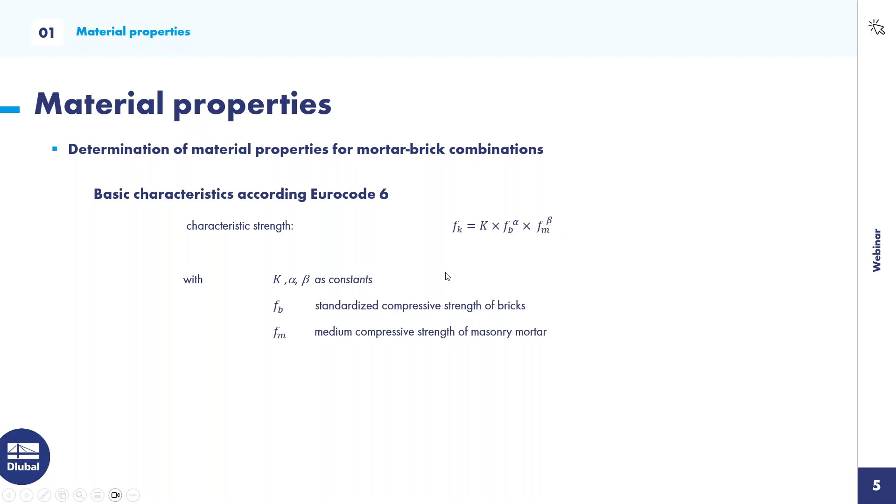When we now choose any product, we can go to the website of a producer, and here you can find some data sheets where the producer gives information about his products. If you choose Porotherm 38, for example, you can find an Fb of 11.5 and a stone group of 2.

With this information, we can go back to the standard and find that the constant K is 0.7 and the constant alpha is 0.7. We had the Fb, and with this information we can compute our characteristic strength. In case of using a thin layered mortar, the part of the mortar has no influence on the characteristic strength, so we only have the part K multiplied with Fb.

If we compute this, we get an Fk of 3.87. When we go back to the data sheet, sometimes the value Fk is also given, and here you can see in the case of thin layered mortar, we have an Fk of 3.8. If we have another mortar, here called dry fix, you have another Fk.

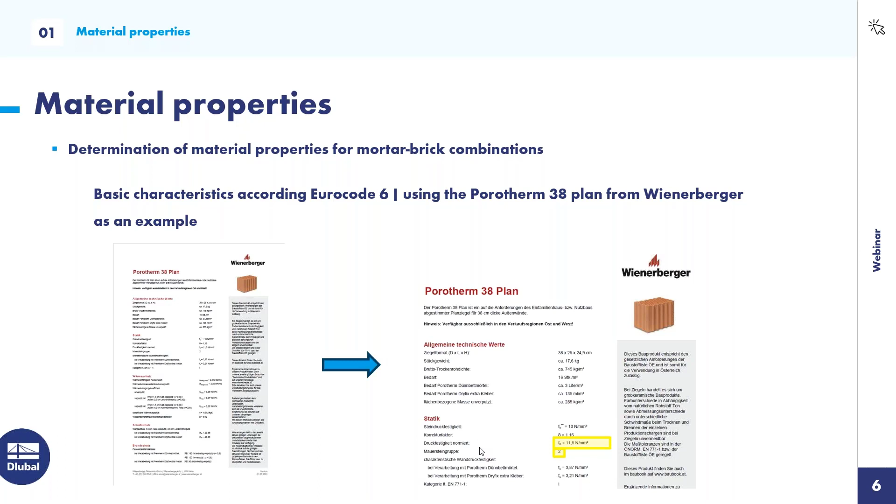So the next step we need is the design value. The design value depends only on the characteristic strength and the safety factor. When you take a look at the standard, in our case we have a safety factor of 2, and then you get the design value.

So two more values we need: one is the Young's modulus. The Young's modulus of the masonry wall depends only on Fk, and you find the formula Fk multiplied with 1000. Here the left part is some reduction for the case of very small stones.

If you have more very small stones, you have more mortar in the height of a wall, and this has an effect that the Young's modulus is lower. That's why we have a reference height and a needed stone height. If you have the reference height, or a stone height of about 250 millimeters, this factor is nearly 1. It only has an effect when you have small stones.

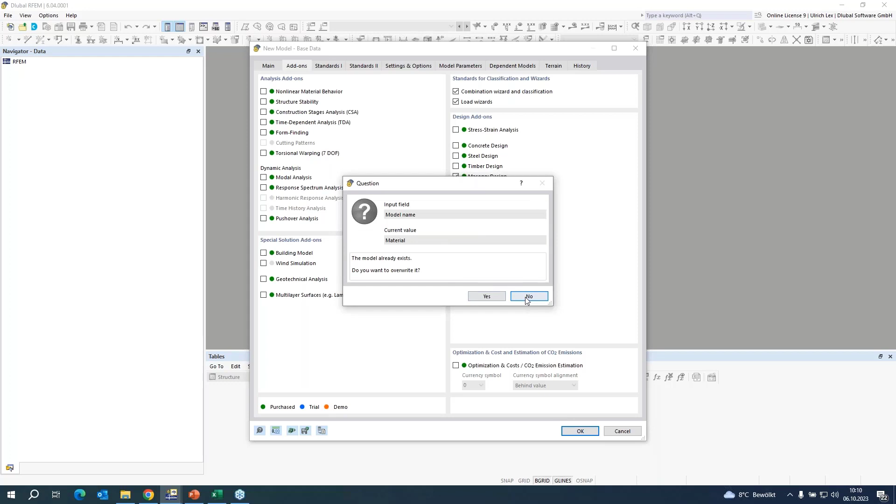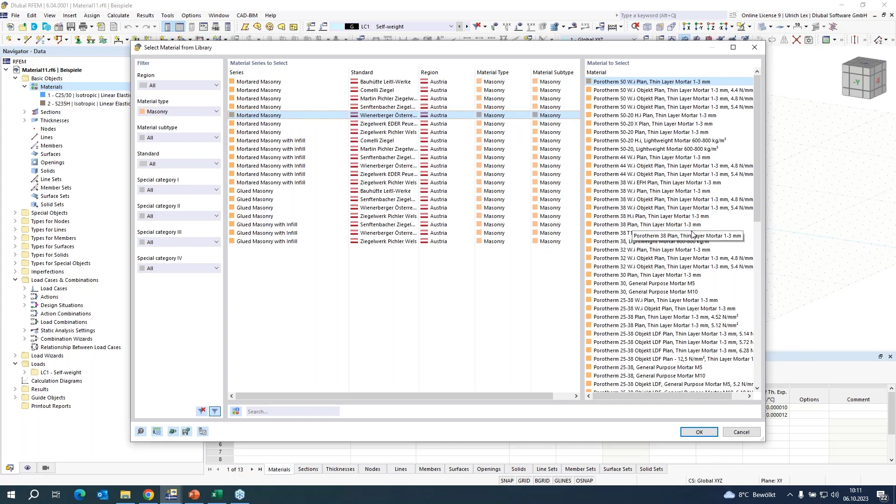And can create the new material. So I have to choose the material type masonry, use our orthotropic material model, and can search in the database for our product. It was the Porotherm 38, thin layered mortar, and choose this product.

So you have here the different cases, and you can see here automatically filled out the tables. You can find the group 2, the mortar, thin layered mortar. You have the dimensions of the stone, and you can find this normalized compressive strength.

If you go to the used parameters in the material model, we can see that we have the ultimate compressive strength now in the loaded direction, 1.93. When I go back to our presentation, we have a design value of 1.93 computed. So it's exactly the same what we use in our program, what we now computed.

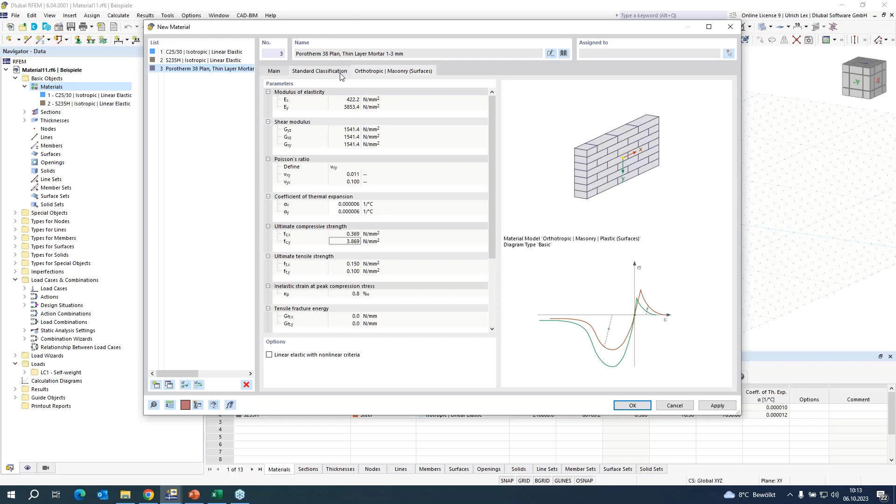So if I change now our safety factor to 1, then you can see that it does not have an influence to the Young's module, but our compressive strength is according to the safety factor 1. And that's all what we do. We use only the parameters from the standard for the calculation.

So I want to continue in the presentation. This computation, what we did, is according to Eurocode 6. If we take a look on the national annex of Germany, then these formulas are a little bit different. In the national annex of Germany, there is used not an FB. For the stone parameters, it is used the FST instead. The FST is the medium stone pressure resistance.

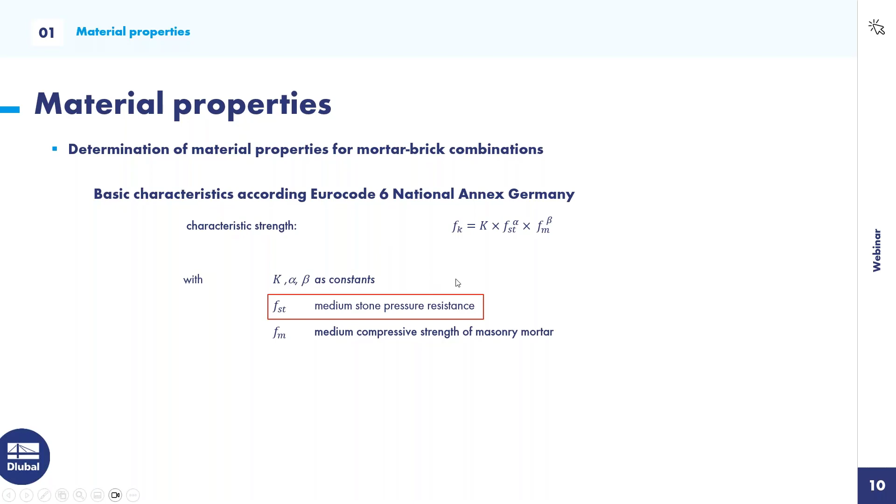So you have to be a little bit careful because there are the same constants called, but they are a little bit different to the main document of Eurocode. But it is the same.

You can choose any product from a manufacturer. You will find here a compressive strength class, maybe of 6, for the product of Porotherm T8. And when we take a look on the standard, you will find that for the compressive strength class of 6, you have an FST of 7.5. The constants K and alpha are 0.7 and 0.605, and you get the FK of 2.37.

We can switch back to the data sheet, and here you can find also the characteristic fk of 2.3. So mostly you find this fk in the data sheet, but sometimes not. Then you can compute it with these formulas.

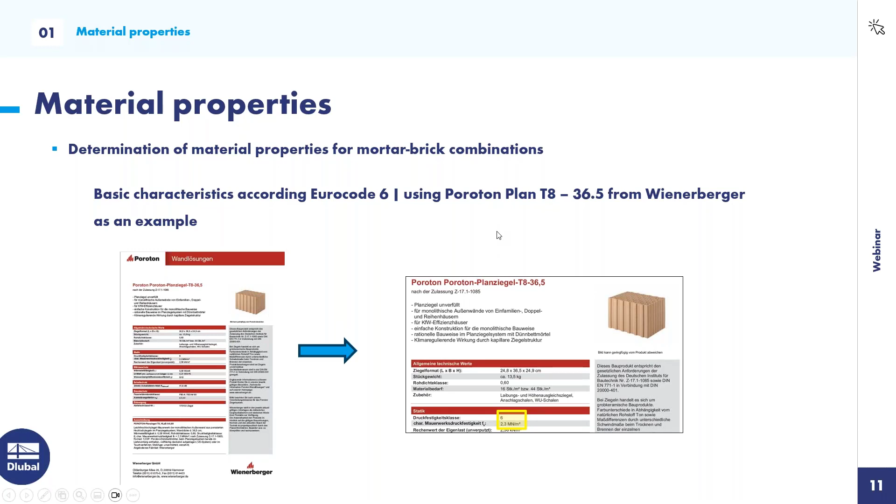The same is here for the design value. You have fk divided by the safety factor. In the case of DIN, you have 1.5 and get an FD of 1.58.

The same is it for the Young's module. We have also again the formula fk with a constant. The constant is in this case 1100, and the shear module is the same like before.

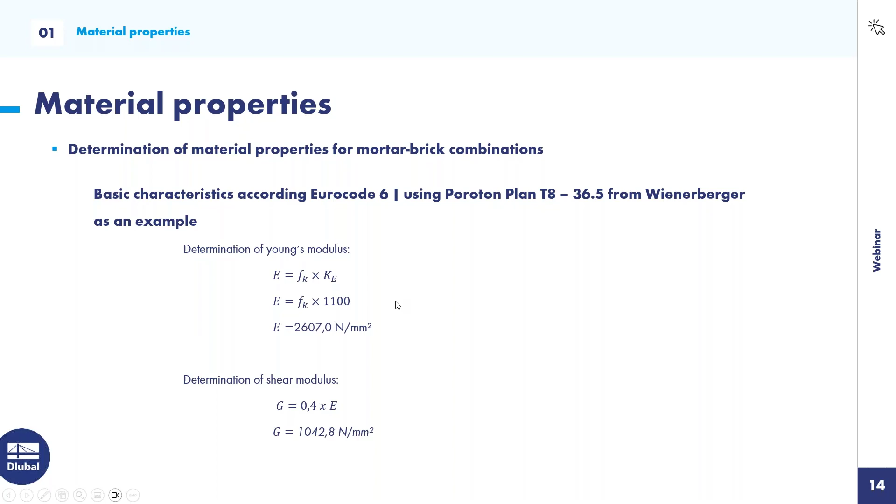Okay, this is all for the theory, and with these computed values we can continue with the second example. In the second example, I want to show you our isotropic plastic material model, where you can determine internal forces of a masonry wall. There is no design check done. It's only to determine internal forces.

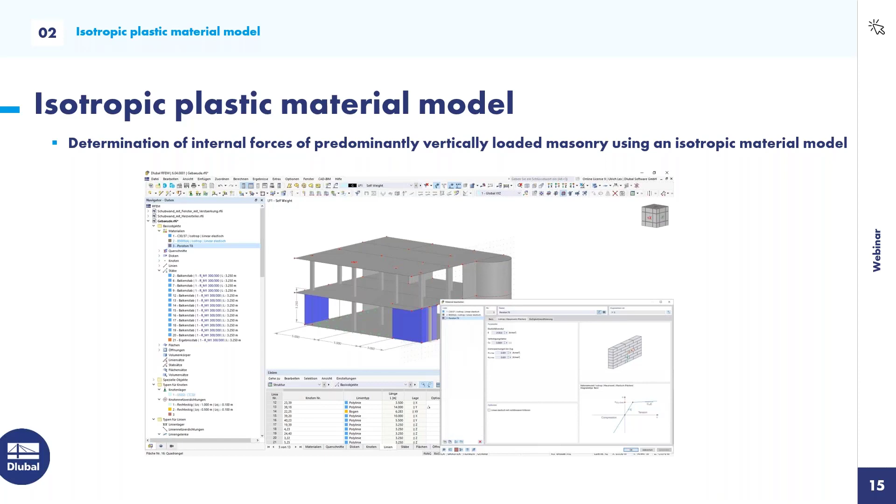So for this, I prepared already an example where I have some concrete walls and concrete slabs, and here I want to add our masonry parts. Firstly, I will show if my masonry add-on is checked on. It's checked on, okay. So I can create a new material with our masonry. Now I want to use the isotropic material model.

And I want to use our computed values before. Maybe we have the E module of 2600. I had to insert it here, 2600. And I had to add the shear module, 1040.

Here I can add the specific weight. You can find it also on the data sheet. And that's all we need for this material model.

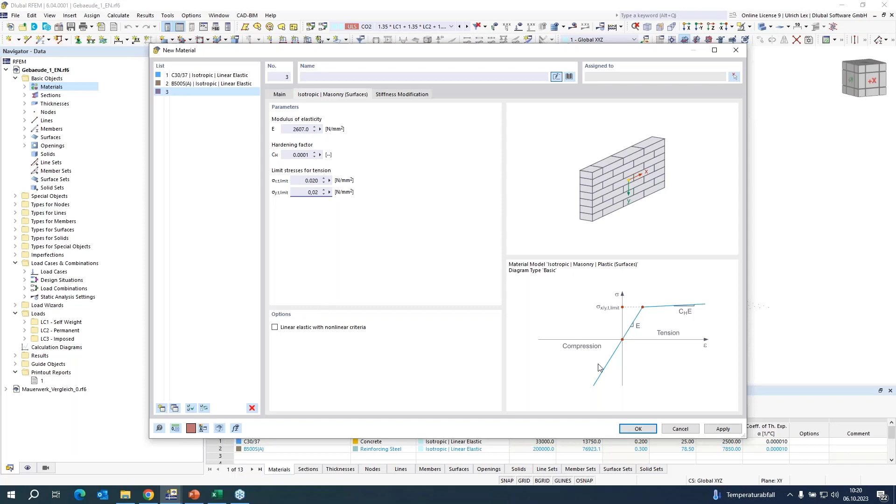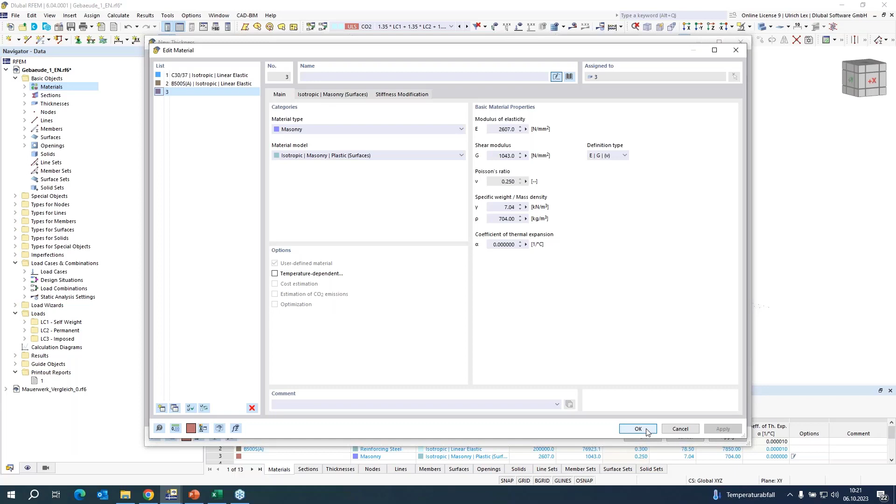If we have done all these inputs, we can continue with OK, and we can create our masonry walls. Oh, firstly, I have to create a new thickness where I use our masonry material type. This stone has a dimension of 365. Okay.

And then I can create my surface.

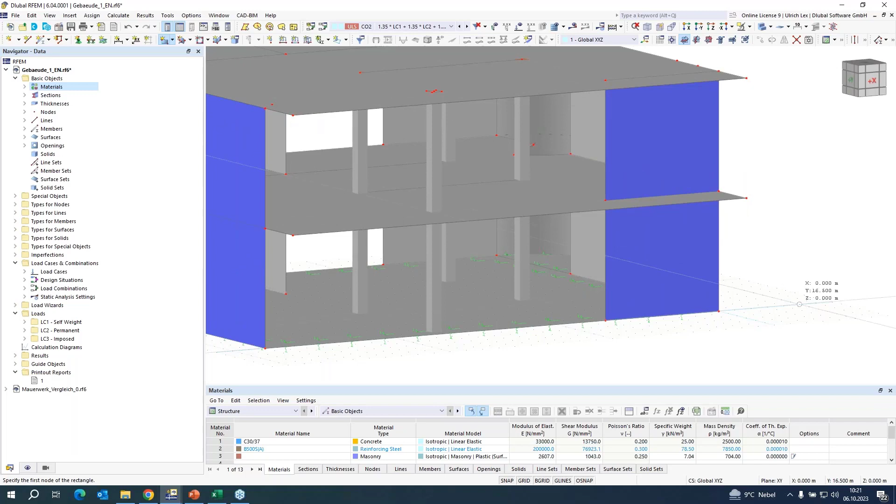In this example, I only want to use these 6 surfaces of masonry.

Okay, the loading I have already created. There is 1 times the self weight, the permanent weight, and the imposed load.

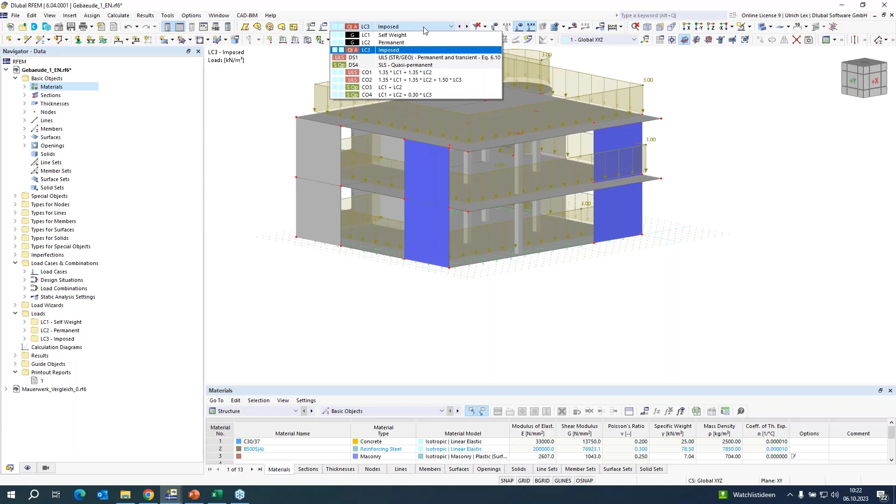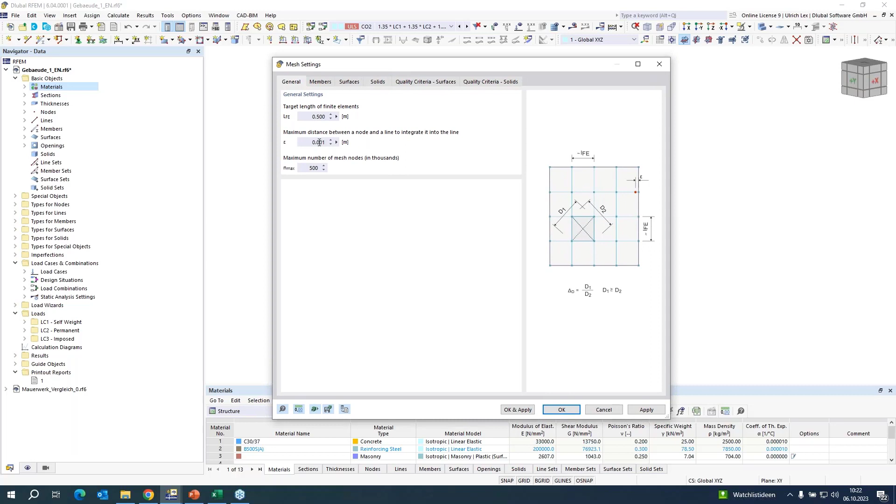And now we can check the FE mesh before the calculation. The FE mesh in general is 0.5. For masonry, it's better to use 0.2 or 0.25.

So I will create a mesh refinement and assign it to my masonry walls. Okay, so far so good. That's all. And now we can compute the building.

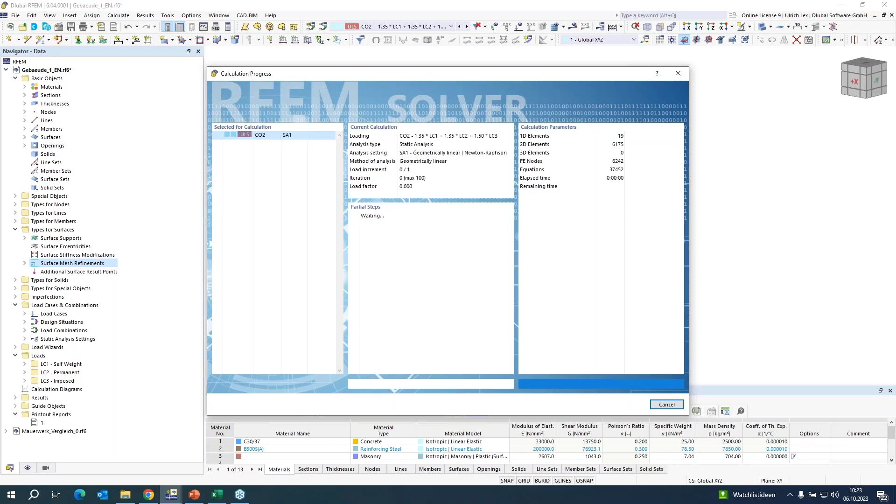So, for the documentation of the results, I have already created one printout report, but here are only tables. And now I want to show you how you can document, especially the results for the masonry, to do any design checks with maybe an Excel file or something else.

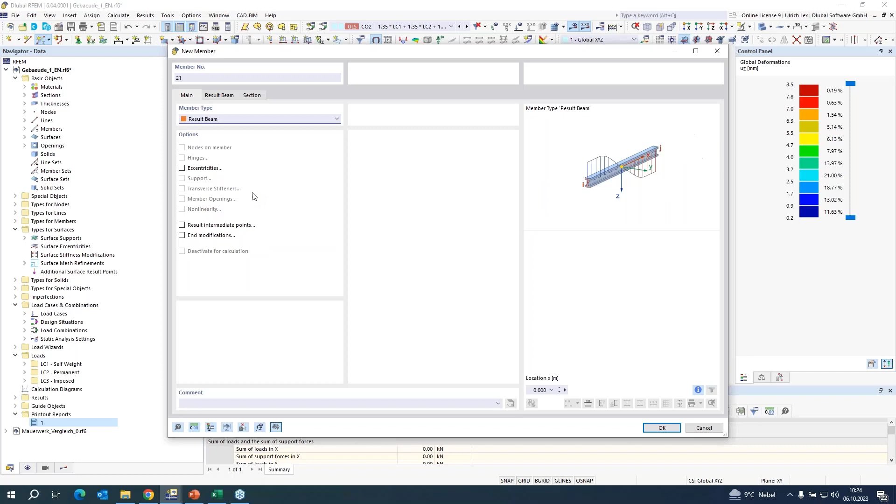One good tool we can use is the result beam. When we create a new result beam, you have the possibility to integrate stresses and forces from a surface and show these results as beam results.

I use now the type to integrate with a block, maybe from 1 meter. Then I get the results per meter.

I want to integrate the results of this surface. Okay. And create here a new result beam.

The result beam itself also has a section, but it does not have an influence for us now. The only thing is the dimension of the integration, and this is 1 meter.

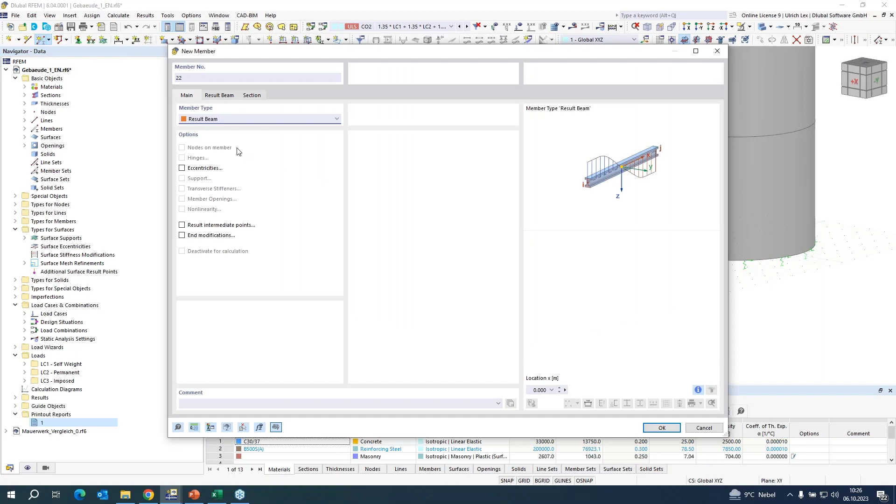We can here create a second beam. Okay. And here we have to integrate the results of this surface.

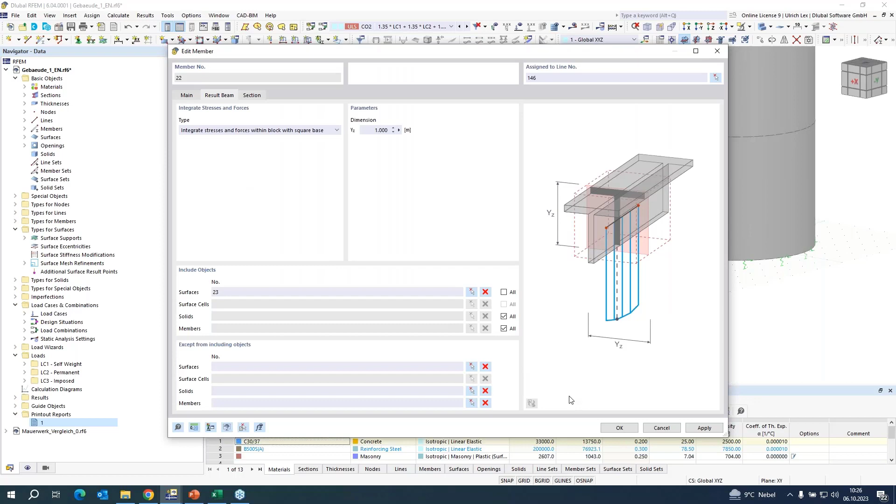Now we have to compute again. If you know that you want to create a result beam, then you can do it before the first calculation. And now you can see that we do not have only the surface results. We have the results of a beam to show to you.

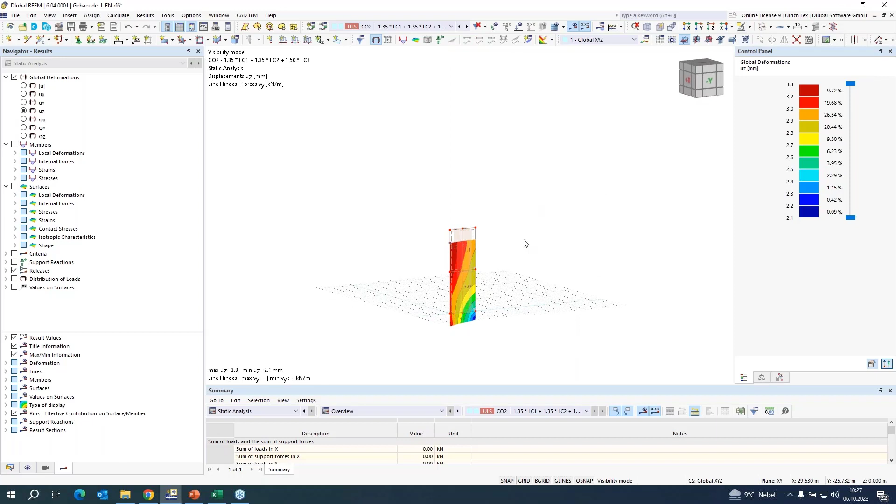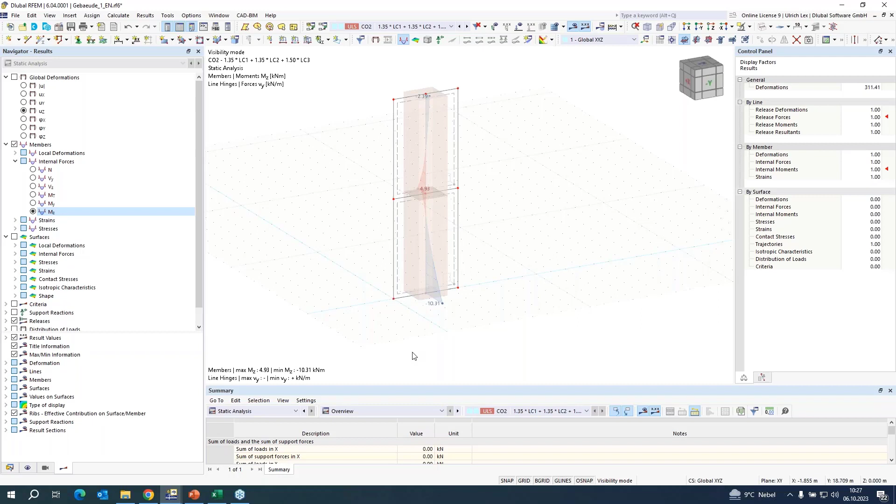And here you have also member results, the internal forces, the normal force, or also the moment. And with these results, you can do further checks. These results you can also document to the printout report.

When you print it to the report, you can use the print graphic to the report. Here you have different settings, maybe as a screen, as window filling. You can define any scale or something else.

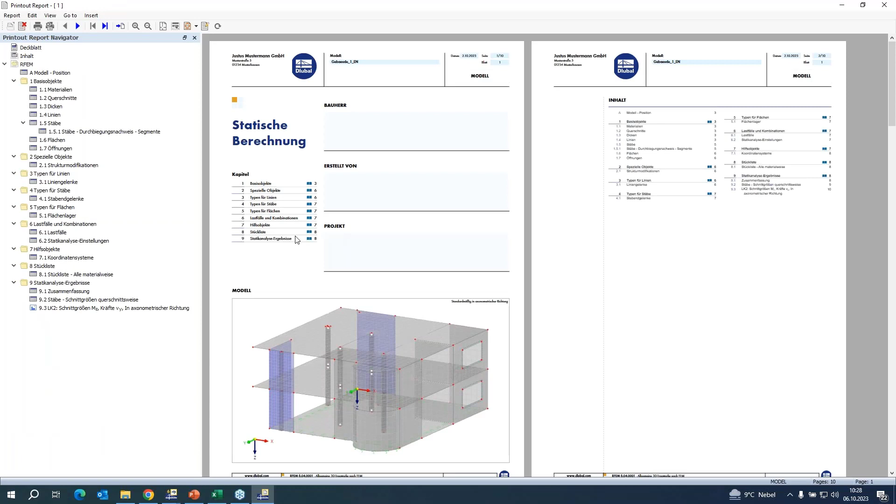If you say save and show, then the printout report is open and you can see where the picture is printed. You have at the end now the report, you get this picture of the results.

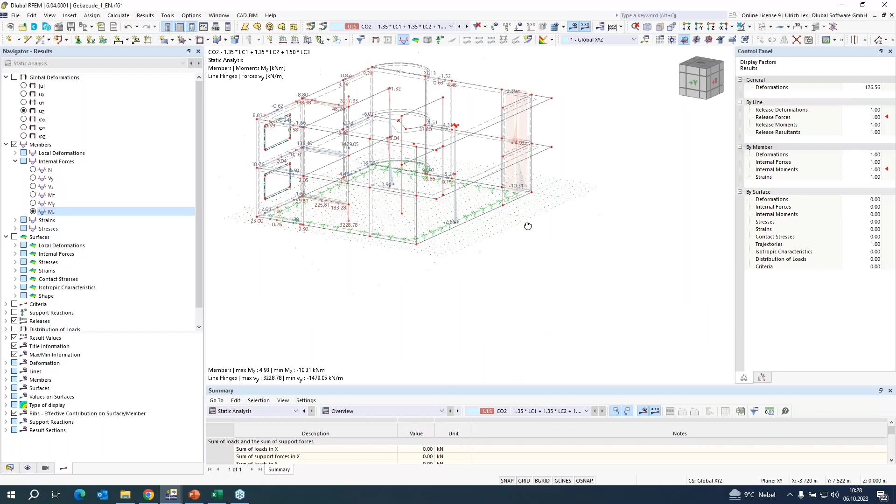A second possibility to document is to use the result diagrams. I want to show it on this wall. Here we can expect that the forces on the end or in the beginning are higher than in the middle of the wall. And this you can show very easily with the result diagrams.

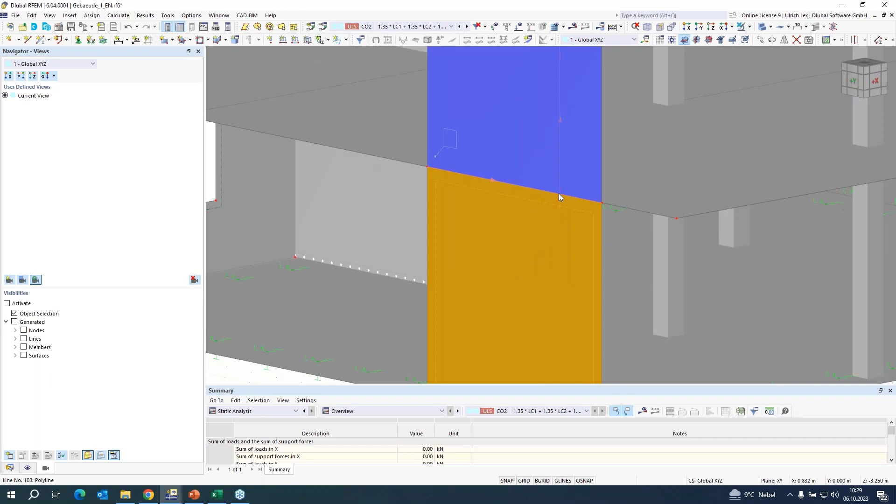I want to show it for the surface number 18 on line number 108. Right click on result diagrams. Can here choose the surface number 18 on line number 108.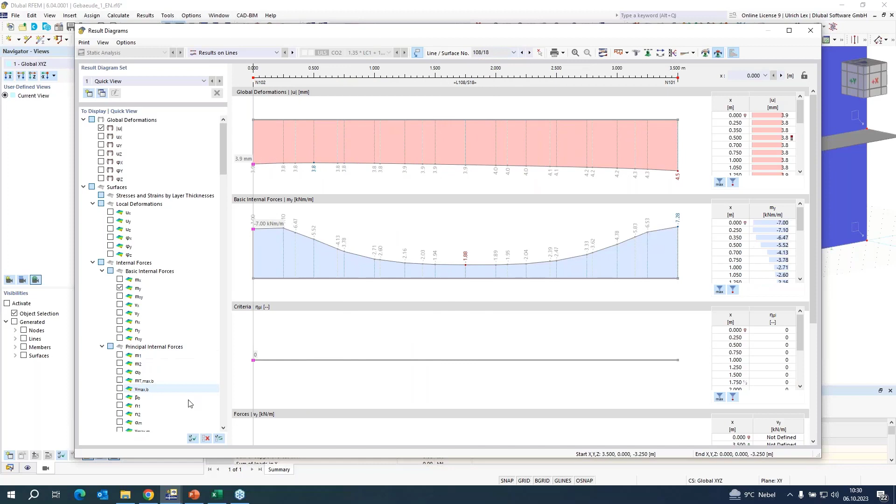And here maybe I can take a look on the basic internal forces, the Ny, it's our normal force. And we can see that the forces on the beginning and on the end are very high.

Here you have the possibility to smooth the results, maybe in a range of 25 centimeters. You can add a smooth area, and also for the end. On the end, it's maybe 3.25, to the end.

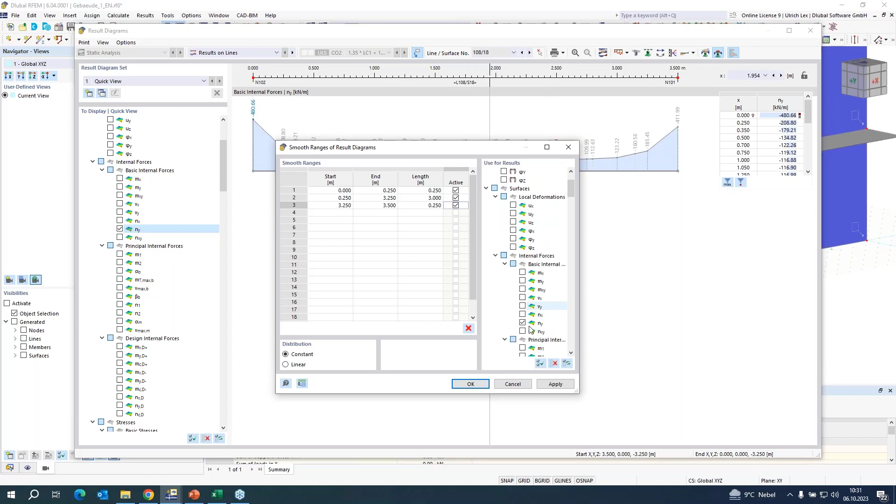You want to use it for the NY, and then you get real forces. You get maybe for the start, nearly 90 kilonewton. For the middle term, you get 124 kilonewton per meter, and on the end you have 75 kilonewton.

This picture can also be printed to the printout report. You have to use again the print icon, print to printout report. You have the possibility to rotate the results.

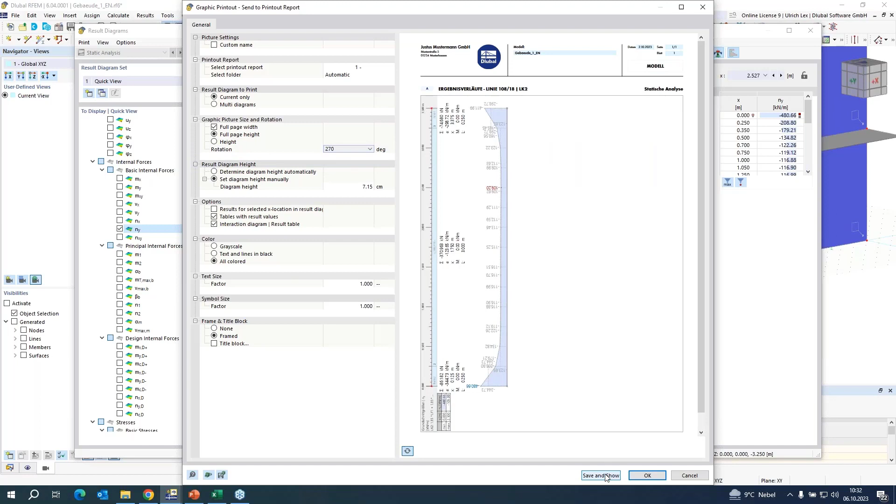And when we again save and show, the printout report is open and the results are documented. So, in this way you can take a look on each surface and print these pictures to the printout report to have all the results you need.

Okay, that's all for this example. One thing I want to show you is the effect of the tensile strength.

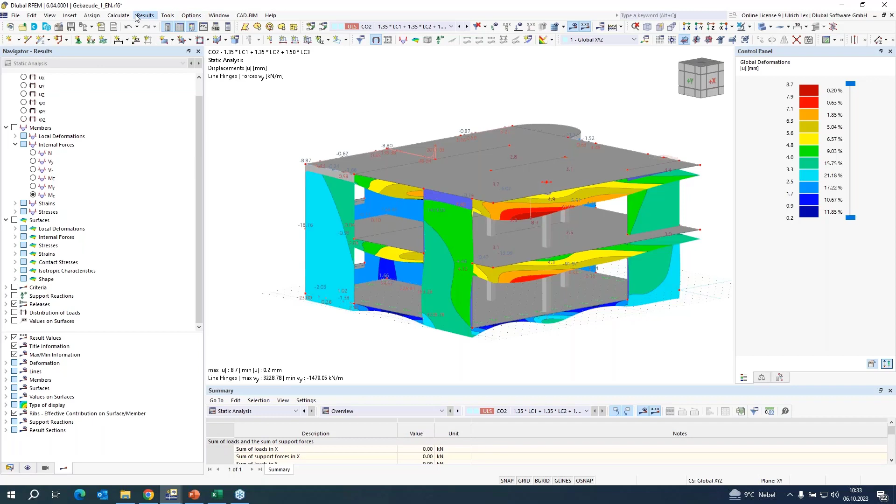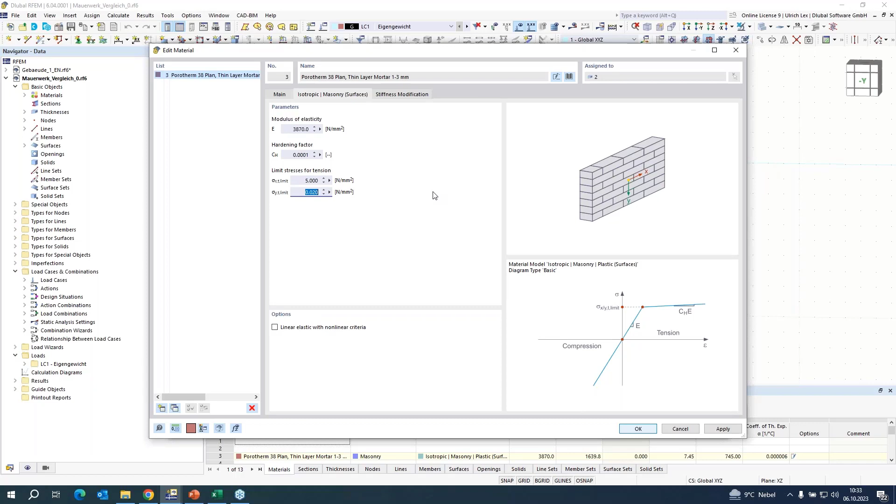I have created one example, one wall with the material model isotropic masonry plastic. And if you now allow a very high limit stress for tension, then you can create the effect that the nearly point load is smoothing to the complete wall.

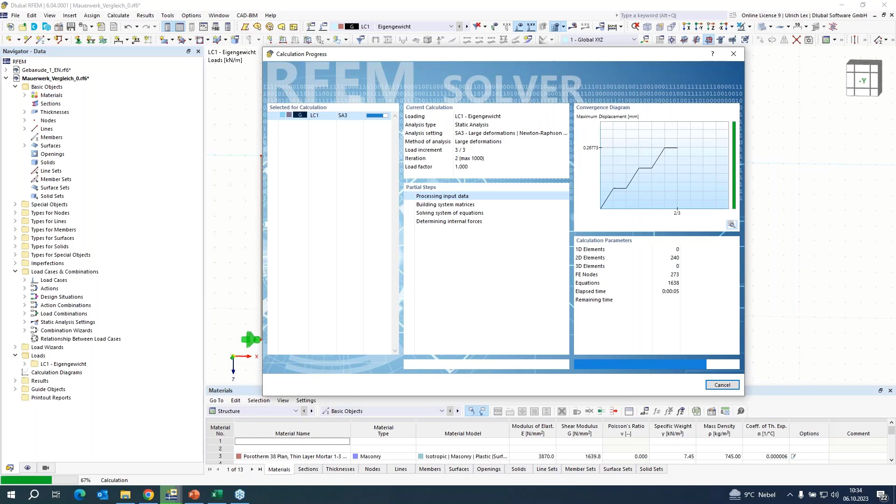So now you can see it on the angle. You can see that the small point load is spread above the whole masonry wall.

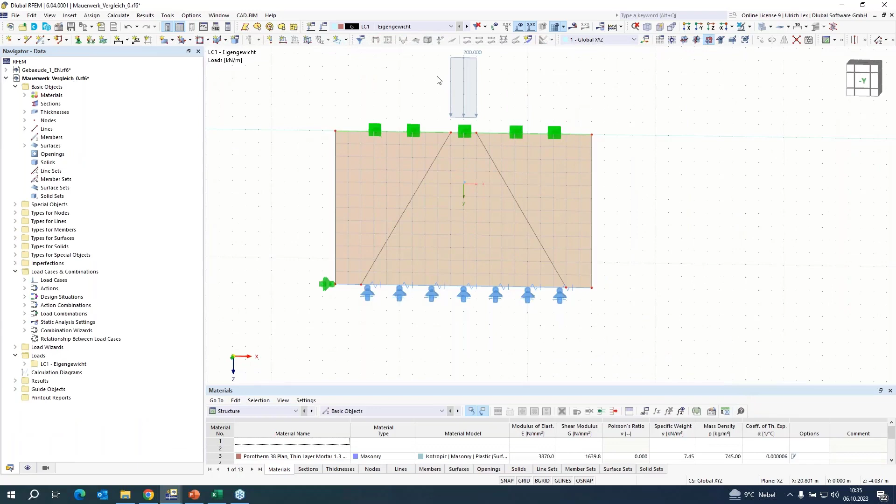If you now change the limit stress for the tensile to a very small value, then you can see that there is no smoothing of this load.

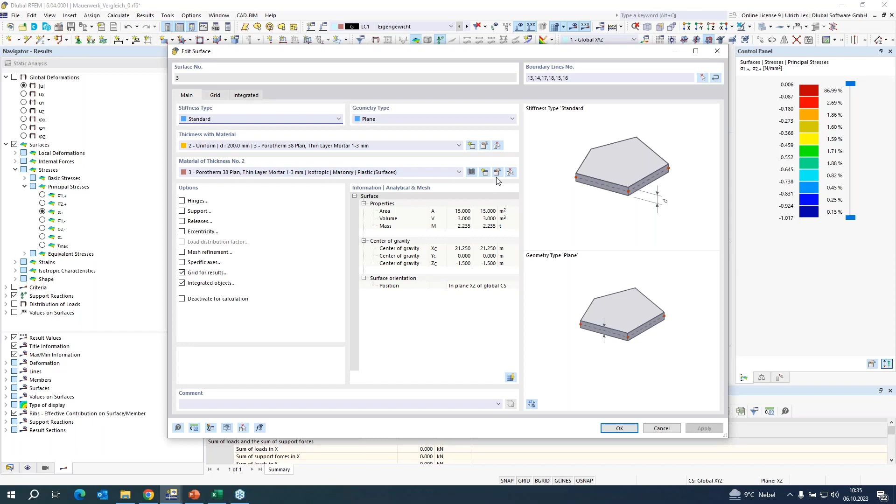You can see that the load nearly goes directly through the wall and has no or not much smoothing. I choose now a tensile strength of 0.02, because then I have a smoothing of about 60 degrees, which masonry normally has. So we can see that the smoothing is about 60 degrees, and there the load is smoothed.

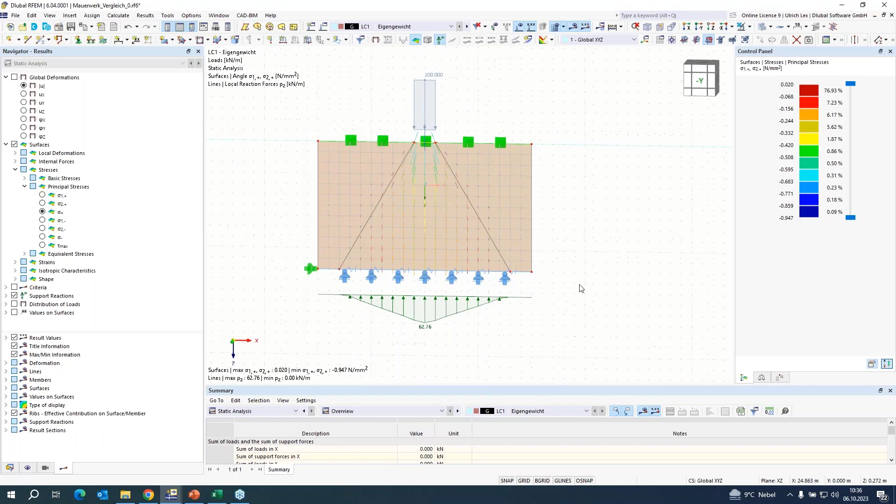Okay, that was all for the second example. I want to go back to the presentation, and I will start with the third example, the shear wall.

For the third example, we want to take a look on an existing wall, where I have an existing calculation: a wall with a vertical load of 390 kilonewton and a horizontal load of 100 kilonewton. The wall is 3 meters. The length of the wall is 3 meters. The height of the wall is 3.50 meters. Now I want to show if there can be created an intersection.

I want to take a look at two different cases. First, if we create the intersection in the lower part of the wall. Second, when we create the intersection like a window, and we want to show if it's possible to create it, if the wall is then overloaded or not.

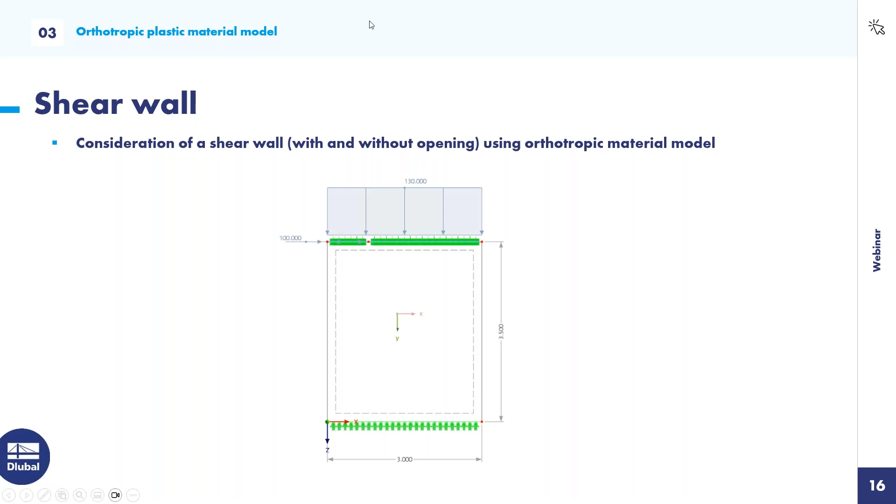So I switch back to the program. For this wall, the first time I want to create new material. With the orthotropic masonry material model, I want to choose one Porotherm 25.

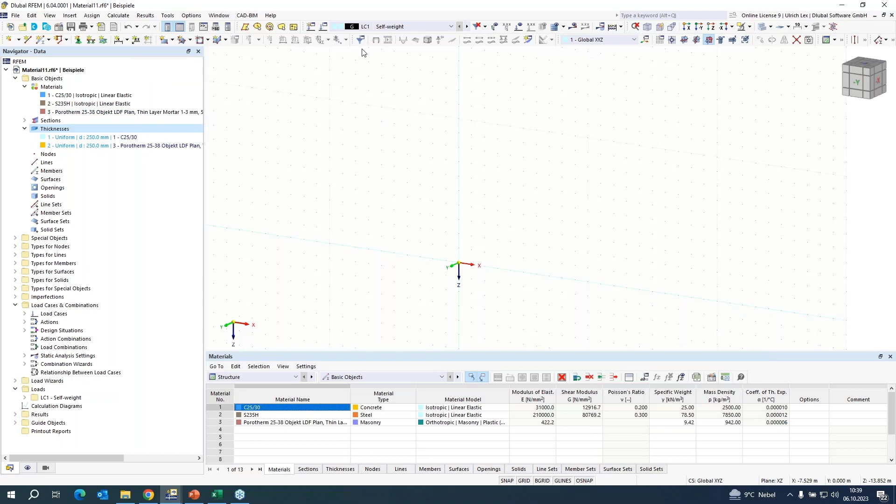So I have to create a thickness with the Porotherm, 250 millimeters. Okay, and now I can create my shear wall.

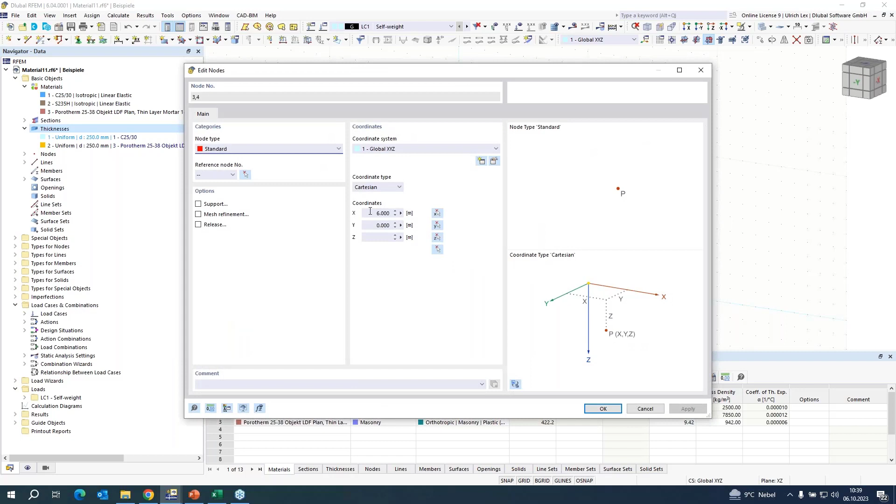With dimensions of 3 by 3.50 meters. The support downside is in Z, X, Y direction and around X. On the top of the wall, I only want to support it in the Y direction, and here a small spring constant.

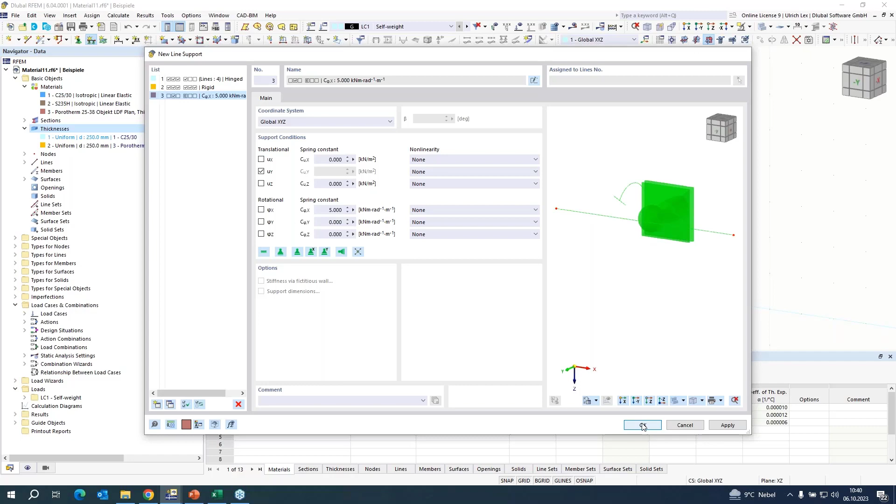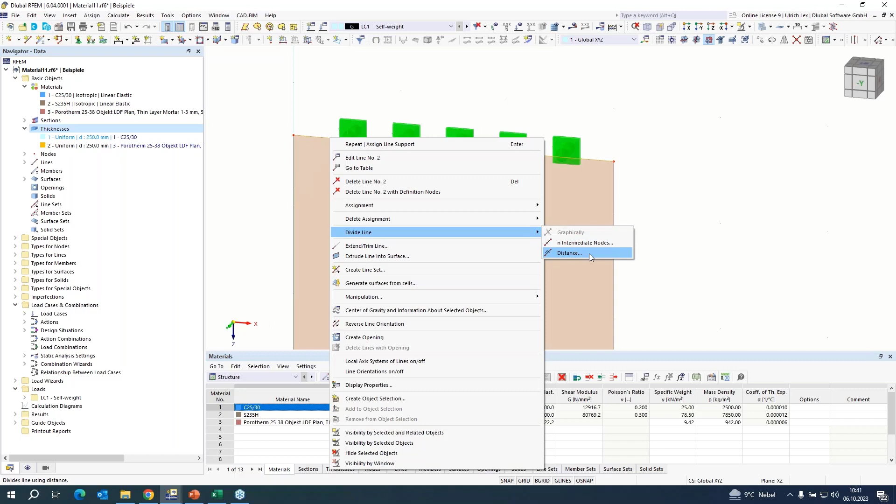So the horizontal load I will bring up, not only at one point. I want to divide the line. Here on the top of the wall, I want to add a small beam so that my horizontal load does not destroy my first FE elements.

So I want to add here a small beam, maybe still a small beam, 50 millimeters.

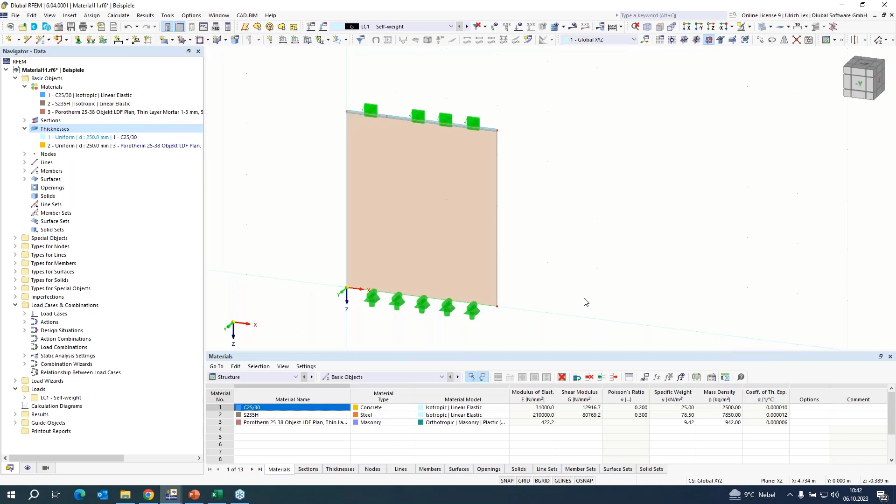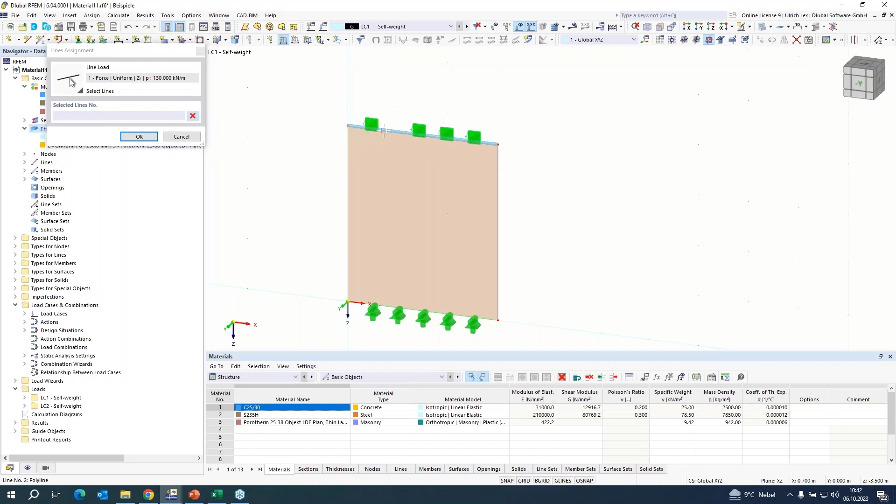So the last part, I had to create the load: one time the vertical load and the horizontal load. In vertical direction I have 130, and over 3 meters that's my 390 kilonewtons, and 100 in X direction.

So before the calculation, we have to take a look at the FE mesh. We want to use 0.25 meters. Okay, and apply.

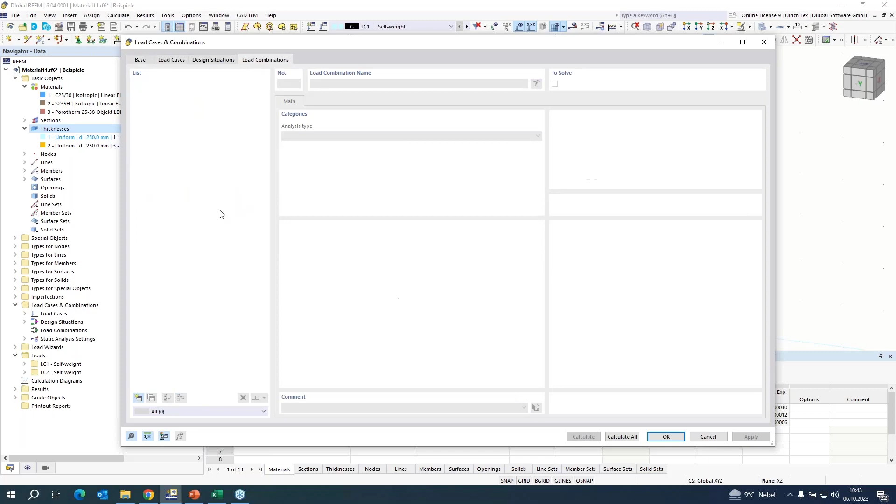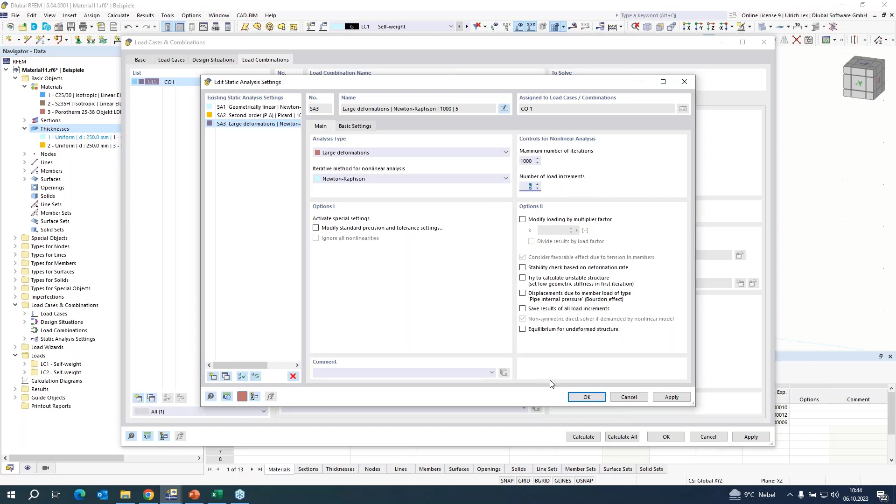And then we can compute; we can create one load combination. We want to use the large deformation analysis and set here some load increments, which is important for the plastic calculation. We can save the results if we want to take a look at it, and we have to assign both loads.

Okay, now we can start the calculation, and now we can see the calculation is possible. The load is not, or the wall is not overloaded. That's what we would expect, because we have an existing calculation, so everything is okay.

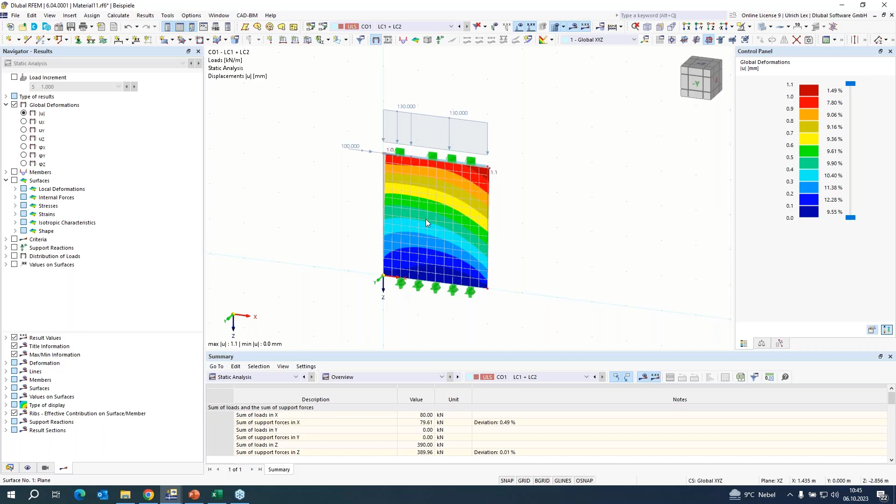So now, what can I do? I can take a look at how much horizontal load the wall can have before the damage, before it's overloaded. It's very easy to take a look at it, and I will do it now.

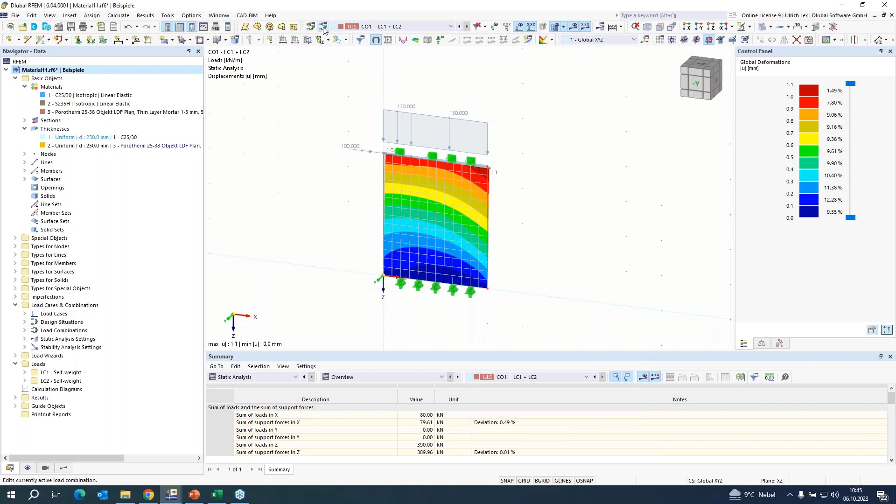So we have to activate our add-on stability analysis. With this stability analysis, I can first copy my horizontal load. Just again. Copy. Okay.

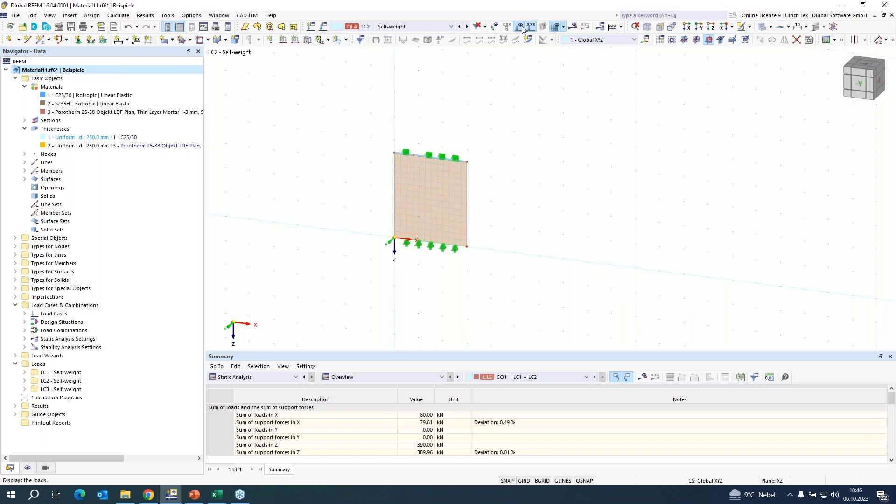Okay, this now it's correct. So I can delete it. I can copy my horizontal load and reduce it maybe to a value of 10.

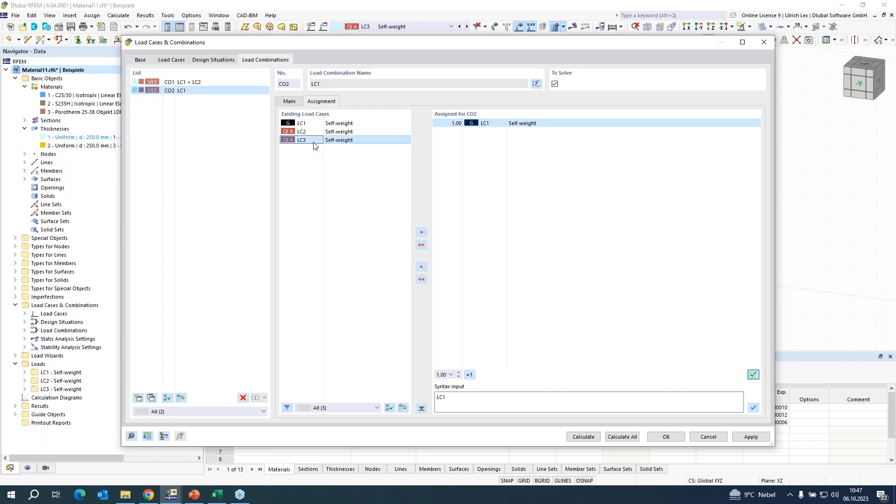I can create after this a new load combination. I have to use also for the load cases the large deformation analysis, and create now a combination of load case 1, my vertical load, case 3, my reduced horizontal load, and say okay, my initial state is the vertical load, and I want to increase my horizontal load until the wall is damaged.

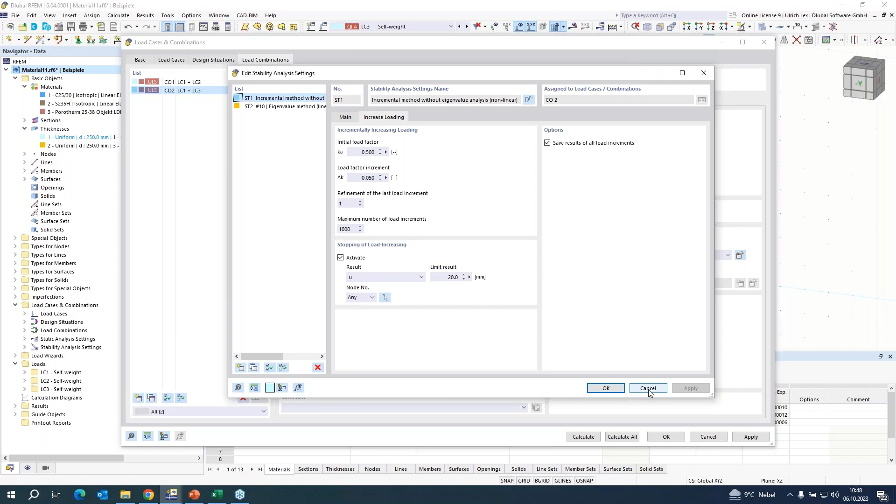Here I can also save the results to show the results at each load step, and I can activate some limit of deformation. Okay, with these settings, I can increase my load until the shear wall is overloaded. The calculation takes about 2 minutes.

That's why I have prepared it with results and want to switch to this file. So when I take a look at the results, here the stability analysis was running, and it shows me that I can increase my load about 8 times, and I get a maximal horizontal load of 110 kilonewtons.

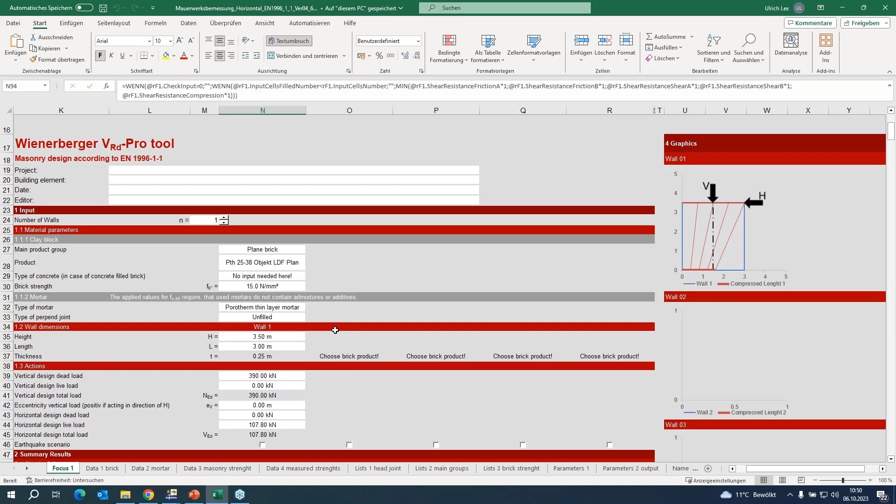If I want to take a look at the formulas according to the standard, we can check if it's the same. I have here a tool from Wienerberger where you can compute the maximal horizontal load. You can choose your stone-mortar combination, insert the wall dimensions, and insert the vertical load, and you get a maximal shear resistance.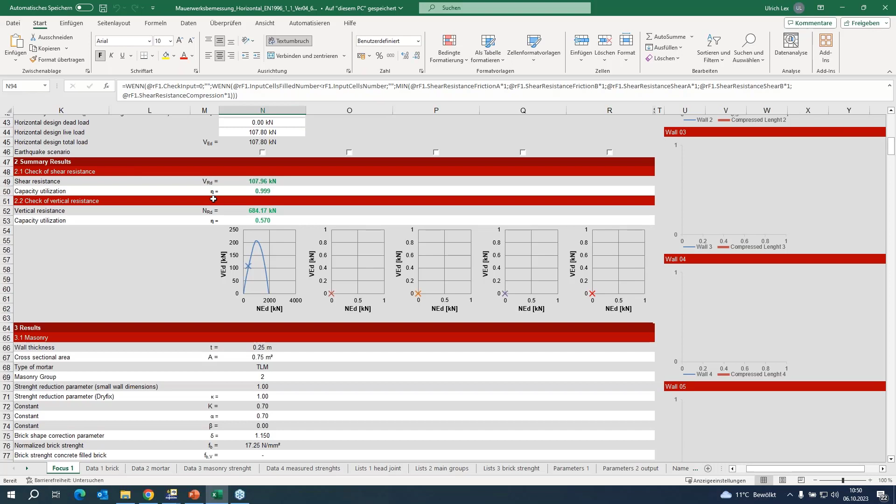The formula according to the standard leads to a value of 108 kilonewton, and we compute with our program a value of 110. So it's nearly the same—I would say it's exactly the same—and it's good, because that shows that our material model computes the same as the standard says.

So now we can continue with our initial problem. We want to create an opening here in the lower part of the wall and want to show or look if the wall is overloaded or not.

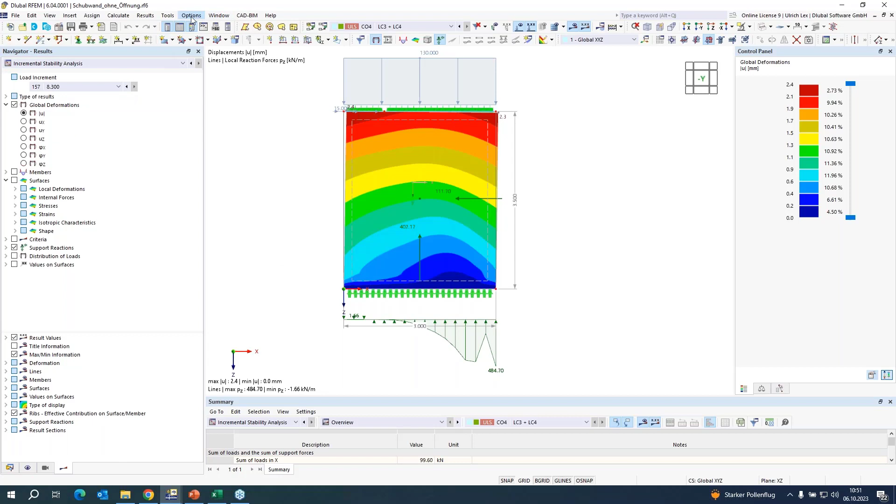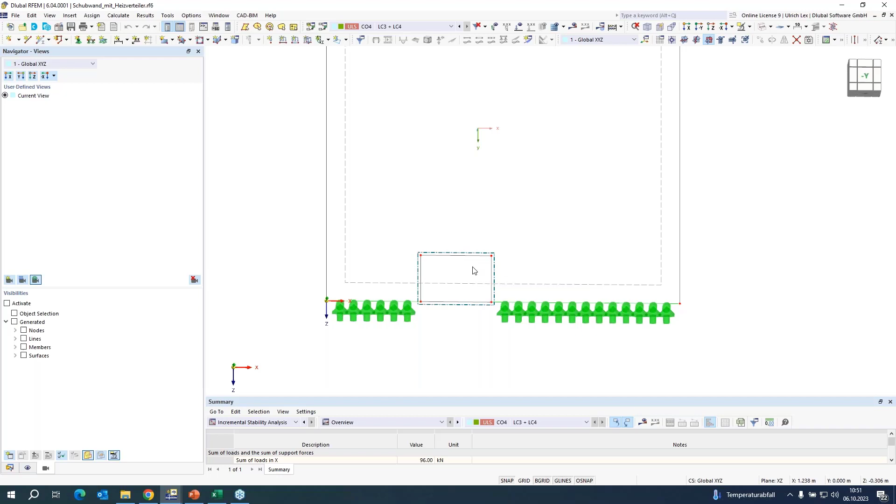I prepared it already. I insert here an opening with the dimension of 40 centimeters in the height and 60 centimeters in the width, and want to take a look if it's possible to load a horizontal load of 80 kilonewton.

There is the same behavior as before. I only create the opening and run the calculation, and the stability analysis. The stability analysis says that I can increase my load 8 times and get a resistance of 96 kilonewton.

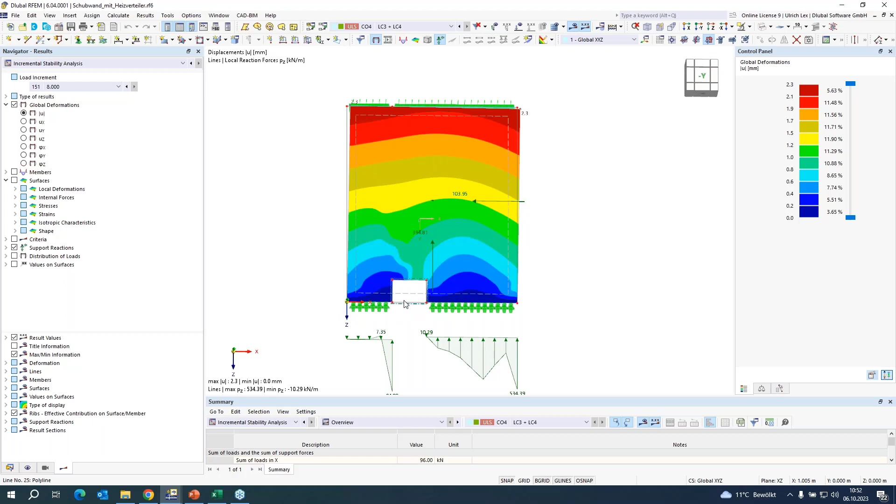That says, or that the result is, that we can create the opening. The wall is not overloaded, and it's possible.

And you can show it in an easy way with this program? When you create it according to standard, you only have the possibility to divide these two surfaces into two parts, and then I think it's not possible to create the opening.

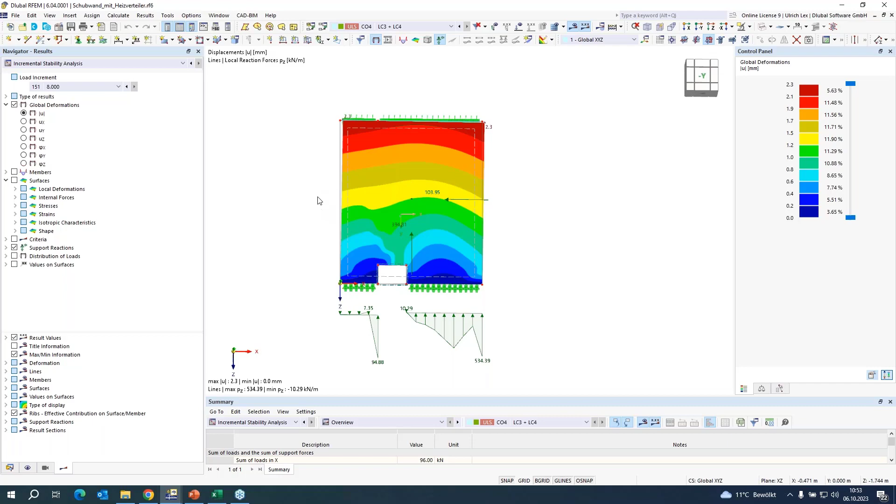So the second case I want to take a look at is to create, instead of the opening in the lower part, an opening like a window in the middle of the wall. I also prepared it.

Now I created the opening like a window. Here it's needed to create a beam, a member above the opening, and I add also a hinge to avoid normal forces in the member.

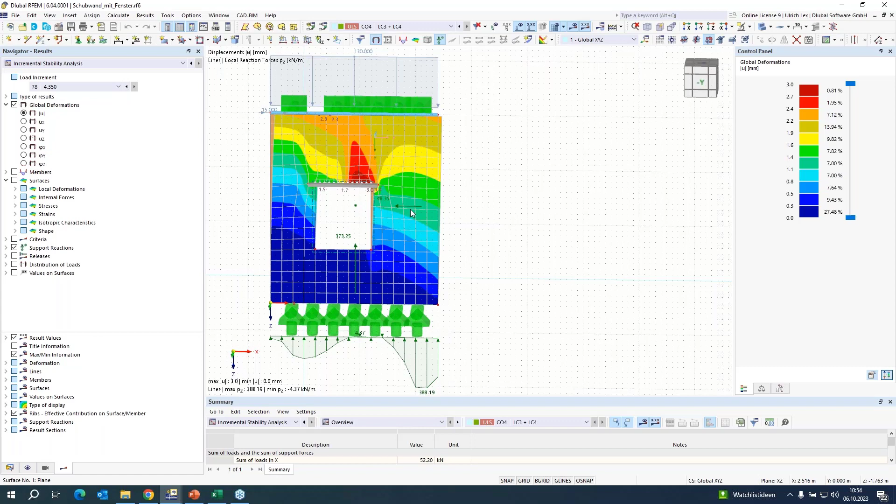If you create it, you can use the same loads. You can do the same as before. You can start the calculation, run the calculation, and see that the maximum horizontal load is now only around 50 kilonewton. So this is not possible, to create such an opening, such a window, in this existing wall, because then the wall is overloaded.

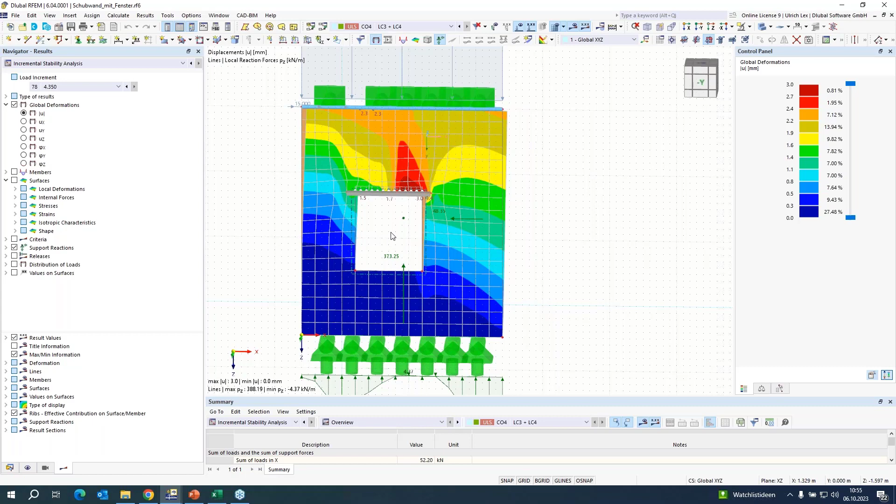But when it's needed to create an opening, then what could we do? Maybe we would have the possibility to create something like a frame inside of the wall, inside of the window. Maybe then it would be possible, and it is very easy to compute it.

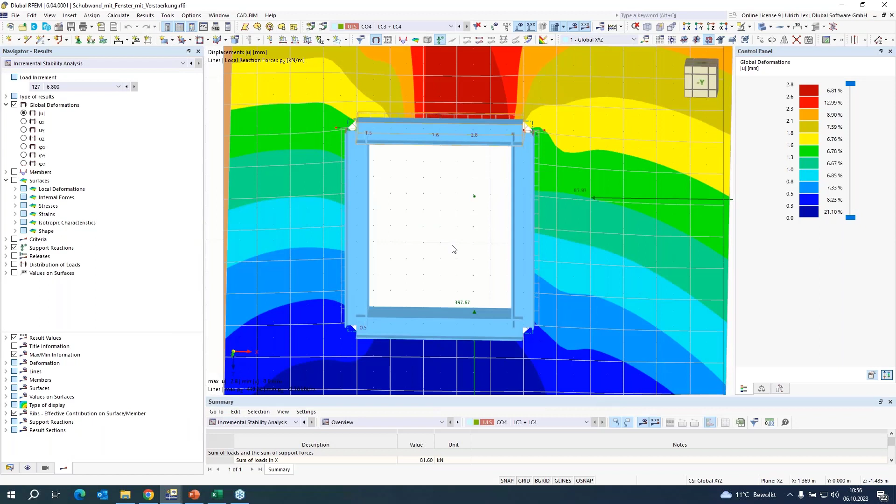I added also a hinge to avoid shear forces, because it's not really connected - so the masonry wall with the steel frame.

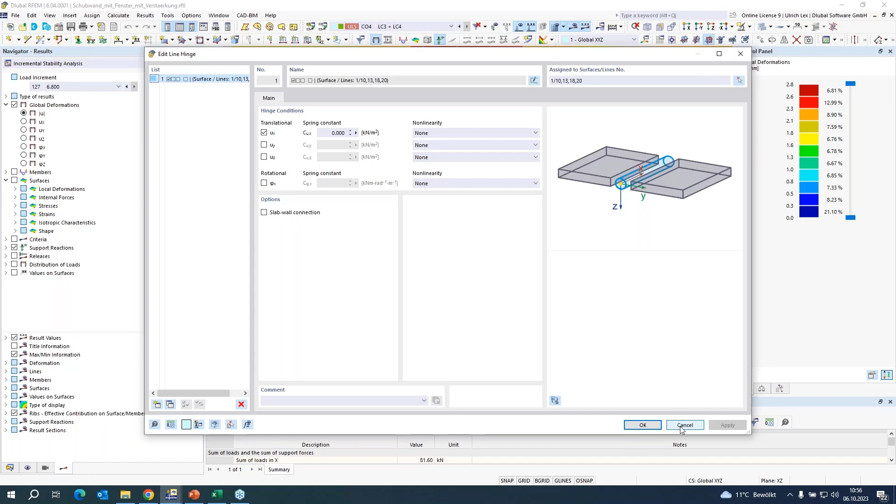And when we created this, we can again run our calculation and see that the results with the frame are about 80 kilonewton maximum possible horizontal load. So you can also create this window in your shear wall.

Okay, with this example, I want to show you what possibilities you have. You can compute on existing walls and find solutions for problems you have where the standards maybe give no solution.